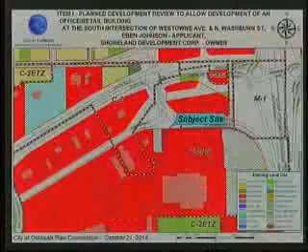Okay, this came before you on August 19th. It was withdrawn before it went to the Common Council. There was an easement on the site. One of the conditions of approval was that easement be released. That has an active sanitary line that services Lowe's and other properties, and it cannot be released. So the petitioners came forward and amended their site design and building design.

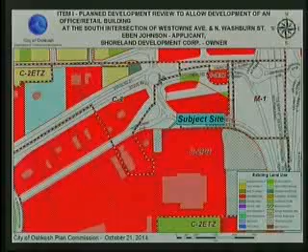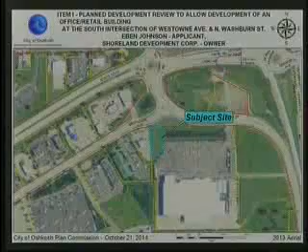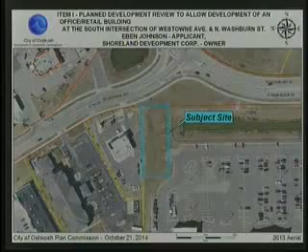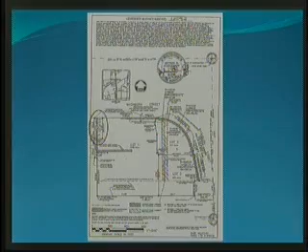So this was the original site plan. You see it had a 3-tenant space, a little bit larger building, and they kind of utilized the site as much as possible. That is being amended now, and I'm sorry for the quality of the image on here, but basically it's being amended where the building is now going to either a 1 or 2 unit building, dropping down to 3,500 square feet.

And it is being shifted as far to the east as possible. What this does - this line right here is that sanitary sewer, and there's a 20-foot easement, so 10 feet on each side of that line. We contacted the Algoma Sanitary District. They're okay with parking going over the top of that, but not building. So the building had to be moved further to the east to get out of that easement area, and also drastically reduced in size.

This site plan, as revised, still needs 3 base standard modifications. One is for that front yard setback - there's a 25-foot required, they're requesting 24 feet. The east building setback is required to be 10 feet, they're requesting 5. And the east parking lot setback required to be 10, and they're requesting 1 foot.

If you remember the argument we had from the original submittal for the front, 25 feet is the setback. If we look at the design of the site, if we reduce the sidewalk from 8 feet to 5 feet, and reduce this rear yard setback from 6 to 5, we can effectively push the entire site down to a 24-foot setback - still a foot under what's required, but it's the least necessary to make the site function. We also felt that pushing it back another 4 or 5 feet would provide a little more sight line coming from this corner to the properties, especially to the west. With the 2 side yard setbacks, the 5 foot for the building and the 1 foot for the parking, we are in support of that.

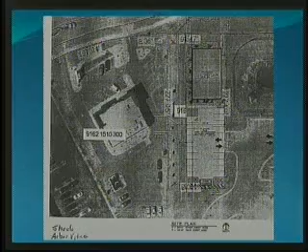We have talked with them, and we received a letter saying they support the project and would allow that encroachment, but not the building — with parking, they're okay with. They had some other conditions, like letting them know when construction starts, that kind of thing, but otherwise no major issue.

The building is substantially the same as what came through last time, although it's reduced. You have the vertical columns to break up the wall mass, and placeholder signage bands along the top. No ground sign is being proposed for this site, so it would be all wall signage.

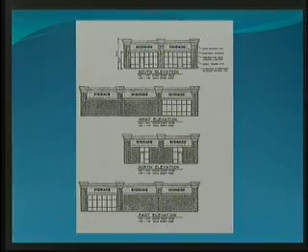On the south side you have large storefront aluminum curtain glass, and on the north side that faces Westowne, you have a smaller entryway and glass system to give that side also not a blank look.

So with that, we are recommending approval of the new development plan with 4 conditions: that the CSM or other instrument that changes the parcel from an outlot to a buildable lot take place; the base standard modification to allow the building's front setback to be 24 feet and the east side yard setback to be 5 feet; a base standard modification for the parking lot's east side yard to be 1 foot; and that all improvements located in the sanitary sewer easement receive approval from the Algoma Sanitary District.

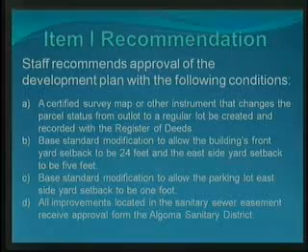Excellent, thank you. Technical questions from the commission?

Okay, seeing none. Anyone here from the audience to speak to this item today? Hi, come on up.

My name is Eben Johnson. I'm the petitioner. Would you like my address? It's 5888 Lake Wind Drive, Oshkosh, Wisconsin, 54904.

David, if you would assist me here, go back to the original proposed drawing and leave it there for a second. I'll ask you to flip forward when I get to that point. What I'm going to ask the committee to consider is please consider 2 things. We'll get to the second one in time.

The first one is to leave the setback at 20 feet from the lot line. There are really 5 reasons why I want you to consider this. David has already touched on this. One, it's obvious there's extra green space well in front to the north there. Now that in the future could be turned into a roundabout, I understand that, so it may not always be like that. Also to the east, you have that pond.

To the west, you have quite a bit of extra green space on that lot, 29 feet from the setback, which is because of the sewer easement, but it's going to be some beautiful green space, and I'll make that look pretty when the time comes. So that's the first thing I want you to consider.

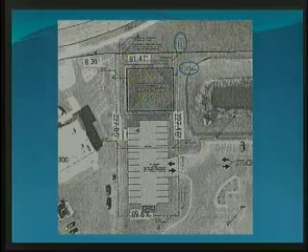Number 3, and I paid a lot of attention to the aesthetics of this project. This is not a pole building with metal sides. What I'd hate to see happen is have the front entryway put to the point where I have just a limited amount of concrete. Then you're pulling a car up to that concrete parallel and opening a car door, then opening the retail outlet door, and suddenly you really don't have a lot of space in between. Not to mention my green space goes away, the shrubs, the stone, everything that makes it look pretty.

When you walk into a retail or office space, that first impression is the front door. And with going down to that 24-foot setback from the 20, that front door looks not good.

After that, I would like to point out that number 4 on my list of reasons to consider this would be the Holiday Inn Express, just on the other side of the westernmost building that you see there, the Cousins and U.S. Cellular. The Holiday Inn Express is 20 feet from the lot line.

Thanks for pointing that out, David. And then I call it 4.5. I did talk to the owner of the building with the Cousins and the U.S. Cellular, Oshkosh Westtown LLC, a gentleman by the name of Peter Youngbacher. He was okay with the first plan, and he said, I have no comments, I'm not going to interfere with that. So those are my comments.

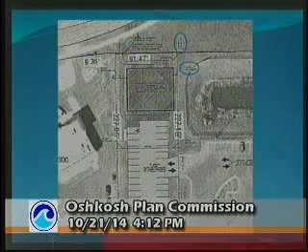Now, the last thing, David, if you would, go back to that original plan. You'll just have to humor me here. This is what the committee approved, this is the corner here. So if we go from the corner to what the committee approved, which was 4 foot back from this corner, that line comes like this. Now, if you go to the new one, let's see here. Oh, this is bad, isn't it? There it is, that's the shadow of what you're proposing. It's this.

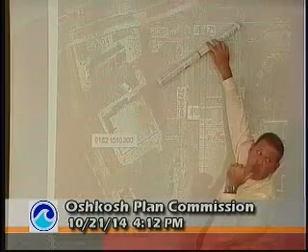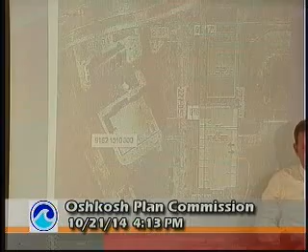What I'm proposing is a lot more visibility than what you approved just a couple short months ago. So it's more visibility than what you had already approved. Considering those 5 things, I'd really hope that you would reconsider and approve that it stays as I requested.

And you're okay with all the other conditions that are on here? Do we have any questions for the petitioner as long as he is available here? Okay, thank you very much.

I have one, I'm sorry, go ahead. The second one, and maybe this is me being somewhat new to this development business, but when it does go to change, I'll need to have a specific instrument drafted to change the lot from an outlot to a lot status. And I would like the minutes to show that it would be okay for me to use an affidavit of correction to change the outlot to a lot. The difference for me is 10 times in cost. Thank you. Okay, thank you.

Anybody else here to speak to this item today? Okay, seeing none, back to the commission for discussion and a vote. Your thoughts on the petitioner's desire?

Well, the basic reason why we pushed it back the 4 feet, or why we're recommending going back the 4 feet, you really don't change any of the landscape area. What you end up doing is reduce this walkway from 8 feet to 5 feet, and this rear yard setback drops down 1 foot to meet code. The real reasoning behind that is 25 feet is the required setback. The functionality of the lot doesn't change whatsoever. The sidewalk does shrink down 3 feet to try to get to that 25. We're looking for the least modification that's necessary to make it function. Your thoughts from, yes, Gary?

As previously stated, this is the exact site itself. I'll have other images that zoom out a bit, but I wanted to start with this close-up one. The subject property is one large parcel right now, just under 5 acres, 4.99 acres in size, located about a half mile from US Highway 41. The existing uses are mixed commercial office space. There are 2 portions: the first half on the left-hand, southwest corner, is the existing commercial buildings, and the northern or northeastern half is the undeveloped space shown in this image. The first 3 buildings were built in 2004 and 2005, and are mixed commercial office space.

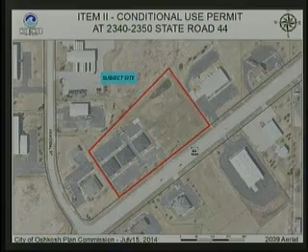This proposal will break the parcel into 2 different pieces. The majority of the parcel will be 3.5 acres, constituting this 4th building that isn't yet developed, along with the 3 existing ones. The second lot would be over here, for the conditional use drive-through restaurant, and that second lot would be about 1.5 acres in size.

Now it has been divided off, so it's making the business park more inclusive. And we are seeing mixed commercial office spaces in there. We have some credit unions, some banks, some other things like that. One thing that we are not seeing on this corridor at all, though, is any sort of restaurant-based or drive-through-based uses.

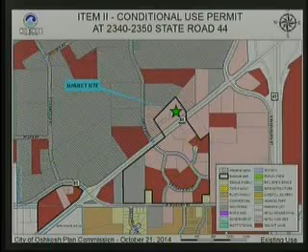With the existing zoning, we can see that there is the business park again with the Universal Business Park and the Southwest Industrial Park. And again, the primary uses, as it's stated, is industrial-based and office retail-based. We do have other uses on this corridor that are consistent with the zoning.

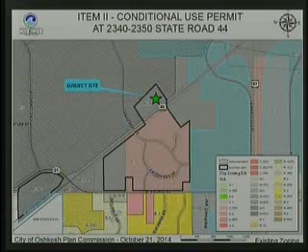We do have some mixed-use retail when it comes to, there's a surplus store in the area, there's the Hostess bread use in the area. So we do have some other uses, but again, no sort of restaurants or anything like that.

To date, the Universal Business Park itself has had about 52% of it developed. That's actually 15 individual buildings with multiple tenants in several of the buildings. So it is fairly successful overall, and we're starting to see some growth.

With this recent economic hit that happened to the area, we have seen a big decline in growth in the area. This is one of those proposals to help bring some more growth into the area.

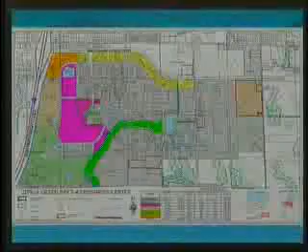So when we go a little bit more into it, I wanted to talk a little bit more about the existing areas. I didn't have a larger view out, but all of the Highway 41 exit ramps south of Butte des Morts do have existing fast food and restaurant uses on it.

Highway 44 is really the only one, if you're heading westbound outside of town, that doesn't have any sort of restaurant or drive-through area. It can really be considered a little food desert when it comes to those fast food uses. Now, there are restaurants within the Prime Outlets area.

There is some convenience at the gas stations, and directly across Highway 41 we do have a considerable amount of restaurants on that side. But this stretch along Highway 44 is pretty vacant when it comes to those uses. So there is a little bit of a drive when it comes to that.

So we see in the Oshkosh area, we have promoted the Universal Business Park as not having any sort of these uses in there. It's pretty clearly stated that restaurants in the business park proper do not have those, but this adjacent lot does allow it.

As I stated before, lots 26 through 32 do have that, stating that a use is appropriate if it's found to be consistent and harmonious with the area. This is one of those uses that we as staff feel the Planning Commission has to make the decision on. And there is a precedent that has been set in some of the other industrial parks.

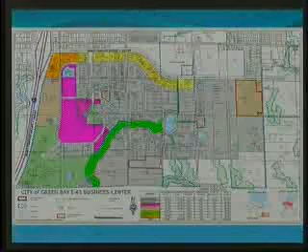This next image actually shows it. This is one of the I-43 Business Center parks up in the Green Bay area. They've chosen to embrace the different uses within their business parks.

Now, again, this is not Oshkosh, this is Green Bay, and they have a totally different viewpoint on their standards, but they have seen other things such as hotels, entertainment centers. This is actually a movie theater, and restaurants, and a future development in the commercial retail and restaurant area. So they have found that these are appropriate for their area.

And we've placed this regulation stating that we can look at this as something that's appropriate if it's found consistent and harmonious.

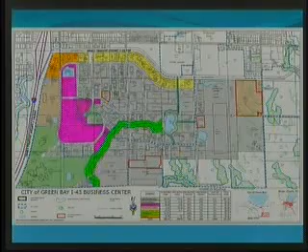The structure itself is 1,749 square feet in size, and it does have a front patio space. The applicant has stated, and the design shows, that they'll have extensive landscaping around it to help buffer the two different uses.

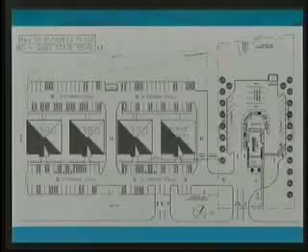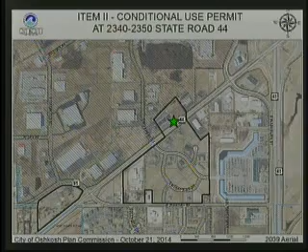Well, what this does, with the existing driveways in the area—when I zoom in further here with this existing driveway—we're getting a stacking of these driveways up. They're not meeting our required spacing. The section of Highway 44 is 45 miles an hour, so they're required to have a 230-foot spacing for these driveways. As proposed, this driveway will only be 145 feet away from the western one and only 105 feet away from the eastern one.

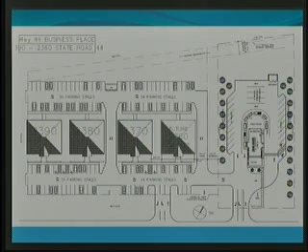Again, the DOT has stated that we are requiring this driveway to be placed directly across the street from the other, so we're kind of stuck in that regard. There are some things that can be done to address this, but it takes a substantial amount of work with the DOT and other things. An example being that this driveway to the eastern or western development could be shifted over in line with this one. What that does, though, is it forces the existing lot to become involved.

Now, this is one lot right now, so again, they could shift this driveway over. That would meet the compliance, but it would only meet the compliance for the 35-mile-an-hour speed limit. This area shifts from 35 to 45. So in the event that the speed were to shift down, it could bring everything else into compliance.

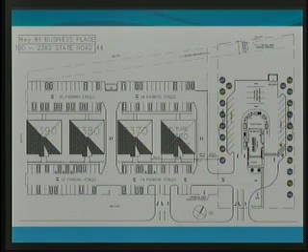One thing I do want to keep reminding you is that the DOT has stated that the driveways are to be placed where they are. There's really only about a 1 to 2% or 1 to 2 foot variation on where that driveway can be, based on their requirements.

If the Plan Commission does feel that traffic is a concern, a traffic impact analysis could be conducted to show that prior to approval, if the Plan Commission feels that's appropriate.

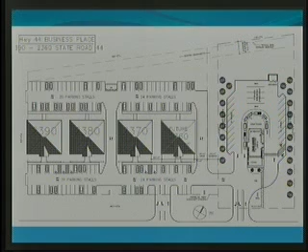There's a second concern that'll have to happen. A cross-access agreement will have to be drafted up with this approval, with the adjacent lot, since splitting off the lot into 2 separate ones requires a cross-access agreement to facilitate the transfer of traffic from one driveway to another.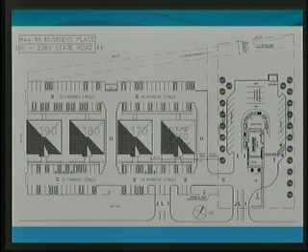Lighting hasn't been submitted with this initial concept. It'll be required through the site plan review process.

When we get closer into this one, there's another consideration when it comes to the signage. I've listed one concern that we did find. Staff doesn't feel that this is going to be anything that'll help deter the project. It can easily be shifted into a different location to meet the requirement. It's just something we caught after the staff report was written up, so we wanted to make you guys aware of it.

The business park covenants and restrictions do state that 2 ground signs are available. They're only requesting 1, so we're well within compliance there. One additional thing is the building itself—this is what the proposed ground sign is going to look like. It meets all of the requirements of the business park as well as the existing industrial park regulations, and the material here is consistent with the proposed material on the structure. It's one requirement that we would have regardless, and they've decided to go ahead and meet that requirement already.

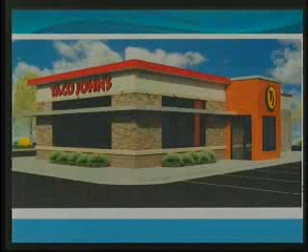This is a rendering of what the building's going to look like as proposed. Currently, the Universal Business Park states that only 1 wall sign is allowed per structure. This has helped to keep the light and some of the other concerns at bay. This proposed sign in the front, the Taco John's main front sign, is in compliance with the requirements for the Universal Business Park.

One additional sign that was requested by the petitioner as well as Taco John's is a large identifier sign on the side. That is in clear violation of the Universal covenants and isn't necessary, so staff is not in support of it as designed. We are listing that as one of the conditions that it be removed from the overall design. Under normal circumstances, if this was in a different area outside of the business park, a sign such as this would be allowed, but because it is within the business park, the requirements state that it is not allowed. So we are following that rule.

When we look at this, we can see some of the landscaping around the edge of the building. Again, this is conceptual of what the landscaping is going to look like, but the applicant and petitioner have stated their willingness to landscape it appropriately and actually increase the landscaping in the area to help accommodate this use. They are acknowledging that this is something different than the use of the area, but they are hopeful that additional landscaping will help mitigate any concerns that other business owners in the area may have with a use that isn't normally consistent.

So we're going to go out just a little bit here. I apologize for the fuzziness of this image. On the left-hand side is an image of the existing buildings at hand, and on the right is the proposed one. What they've tried to do is line it up fairly well with the limited time they did have.

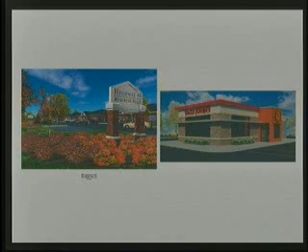That may have been seen if the original development went through with 6 structures all exactly the same. The business park does make that recommendation that there be some variation in the building materials, but still have them overall consistent with the requirements.

This building actually, as designed, has met all of those requirements, and I'll go to this rendering again. All the materials here, with the block bottom with the knee wall, the main stone facade, with what would be the EIFS or stucco-like material on the top, is consistent with the business park, and other structures in the area do have that use.

The business park states that only 3 colors can be used in a normal case, but more colors are allowed if it's in an accent scenario. So that's why this red is still being permitted. With the 3 primary colors and the red, it still meets the requirements of the area.

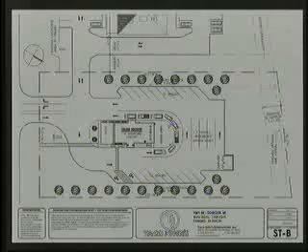There were some additional concerns that were brought up with the site plan, and I'm just going to go back a couple slides here to show it. With this existing stormwater detention facility, we would require that they have easements and restrictions stated, sharing the use of that. They will have to work with the existing property owner to the west to have that happen.

One thing that was brought up after the fact: the petitioner has stated that they're willing to move this dumpster. Currently, as designed, this dumpster is located within that stormwater detention facility, and that is not allowed. They've stated that they'll move it. It's not going to be a problem. We did list that as one of the conditions.

Besides that depicted stormwater management facility, no formal stormwater management, grading, or erosion plan has been submitted by the petitioner. This concept approves the conditional use and/or finds that the use itself is harmonious. All of those documents are required through the site plan review process, and the Department of Public Works will be reviewing those during the site plan review. We don't have the specifics on what the facility is going to be designed as, but we do know that the facility itself is going to be draining into that existing stormwater detention basin.

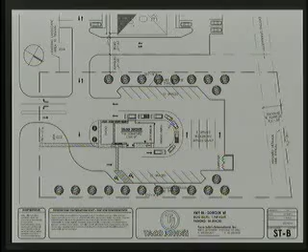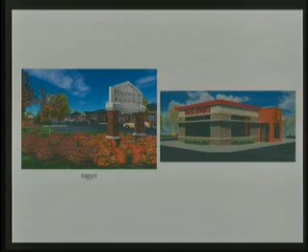So with that, we are asking that the Plan Commission take 2 actions. The first action is to find that this use is consistent and harmonious with the existing area. And the second is more detailed into the site plan review process, finding that the proposed use is consistent with Section 30-11(D) of the zoning ordinance, with the following conditions.

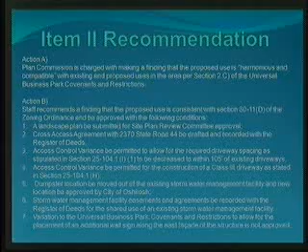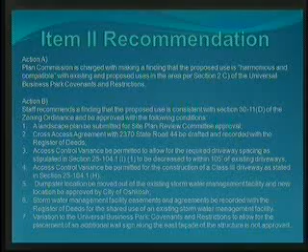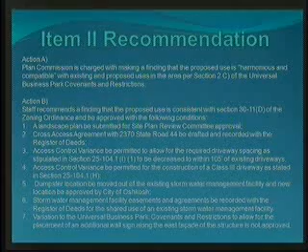I'm not going to read them all off, we went through them all. But again, the big ones are: the landscaping plan has to be submitted, the cross-access agreements have to be provided, one for the adjacent structure, and then the access control variance be permitted as designed. You can, as a Plan Commission, allow the traffic impact analysis to go into greater detail on that if you see fit.

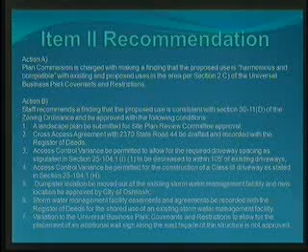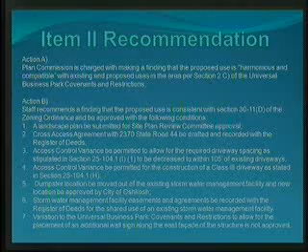Also, the dumpster location has to be moved, and the stormwater facility has to be properly recorded with the appropriate easements and documents. And then lastly, the variation to the Universal Business Park covenants to allow for the placement of an additional wall sign on that side. Again, we are not approving that, but it is one of the conditions stating that we are not in support of it.

So I'll leave it up to the Plan Commission to discuss.

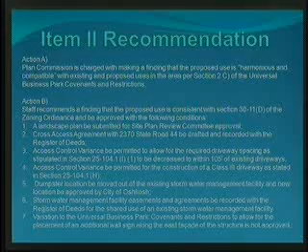Technical questions, Carl? Does this require 2 separate motions or 1 motion for both items? We would like 2 separate motions on that. You'd have to do action A, the finding of harmonious use, first before the CUP. Good question. Other technical questions?

Ed, and then Gary. I'm maybe just getting muddied here, but DOT Section 25-104.1 requires that all driveways with a posted speed of 45 be spaced 230 feet apart.

So this driveway here would be 105 feet from the next driveway to the west? This driveway, as shown, is 145 feet separating the two. There's one additional driveway just off the page to the east. That's the 105 feet. That's the 100. Correct, that's the 105. So okay, there's actually two different driveways here.

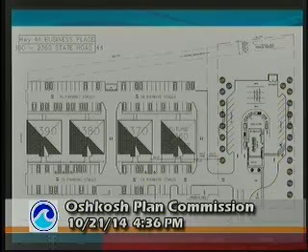So do we have, the access control variance granted under city code, the ability to override the DOT's standards?

So if we permit it to be spaced 105 feet apart, does the DOT likely come in and say, great, you said that, but we don't allow you to do anything within 230 anyway? The 230 is a city code requirement, from a city ordinance, not DOT.

So the only thing the DOT requires is lining it up. They've reviewed the locations and said they want them across from each other. That's correct. They're not saying anything about the distance. They don't have any standards on state highways for the distance. They're deferring to us in this instance.

I think they reviewed it all as part of the permit issuance. They would have looked at the situation. I guess I didn't realize they'd already reviewed it as part of it. I thought we were just going by whatever their standards were. No, they reviewed it. In this case, the petitioner has requested the permit be taken out, and DOT has given the permit for the driveway location as stated.

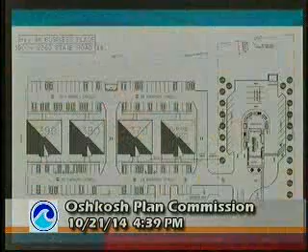The 105 feet is to allow one driveway within 105 feet of a different driveway from a different lot, a different parcel. The access control variance in statement 4 is to permit the construction of a Class 3 driveway - this is the driveway with 3 driving lanes, 2 exits and 1 entrance with a 4-foot rumble strip in the middle. It's not normally allowed in this area, but it has been allowed with other developments consistent with this one. The petitioner has requested that be put in there.

So again, there's 2 different variances that are necessary. One is to allow the locations of the driveway, and the second is to allow the different driveway style as constructed.

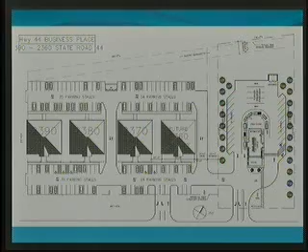There's a quick technical note on that - it's not a Class 3 driveway. Class 3 is for truck traffic, that's the width for truck traffic. I don't think this fits into the truck traffic category. Right, it's a Class 2, but it's that three-lane class driveway you've seen quite a few times. It just allows two outgoing and one incoming, with a rumble strip. Okay, but it's still a Class 2, it's not a truck one, Class 2 or 3 lanes.

Next question. Am I correct in assuming that the various other conditions and requirements in the covenant will be reviewed by the site plan review committee for compliance? Because there are some landscaping and building material items in the covenant that I think should be applied. That's correct, yes, all pieces of the design will go through the site plan review.

And I think on this lot, the covenant is very flexible, and basically the building materials can be anything other than probably wood. I think the design personally is kind of strange, but I think all fast food buildings are kind of strange.

I guess the next question I have... I guess that's it. Thank you, Mr. Chairman. Other technical questions? Okay.